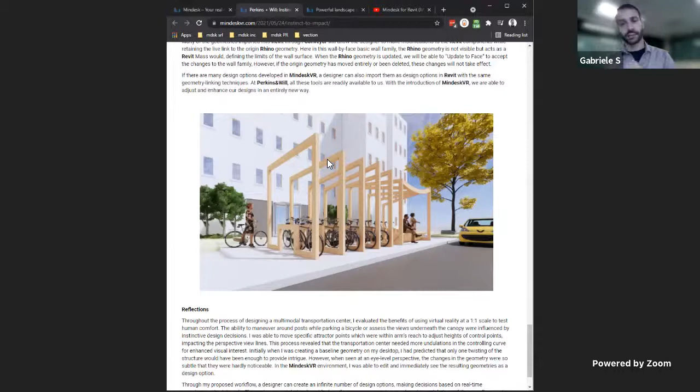But again, the data is flexible, so this geometry data can be pushed into Unreal, for example, to have a rendered view. So you can then do things like solar studies, shadows, glare, and much more, or just create a video presentation for your client that is beautiful and stunning.

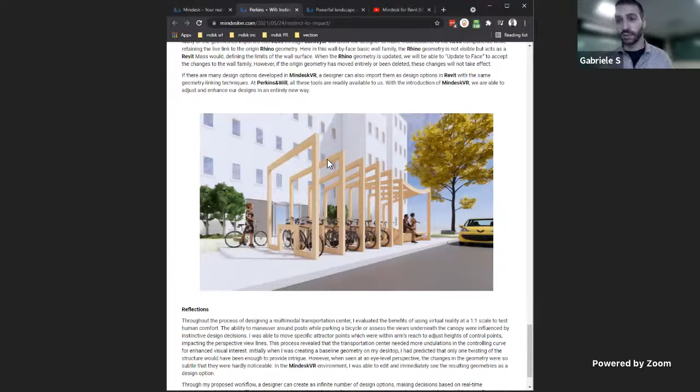All right. So I want to show you now how the software works operationally. I just need a moment to load my VR headset. Can you still hear me? I can hear you.

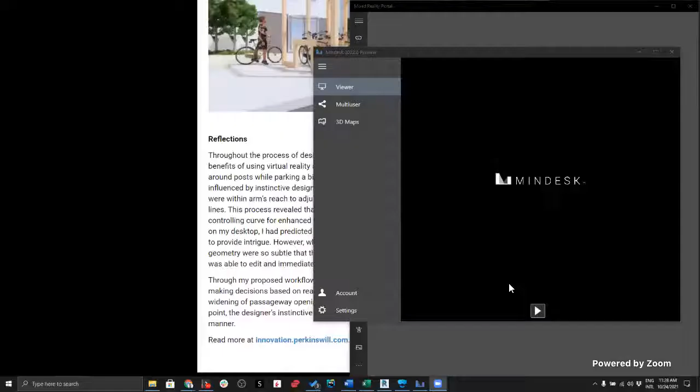We're actually sending a letter to both Zoom and Microsoft, so this can be implemented and handled better in future Windows applications. But yeah, it's normal business. Okay, so now we can move forward. I can share my monitor and show you how the process works. I have prepared a very simple project. We can now see side by side the Revit model and the Mindesk interface.

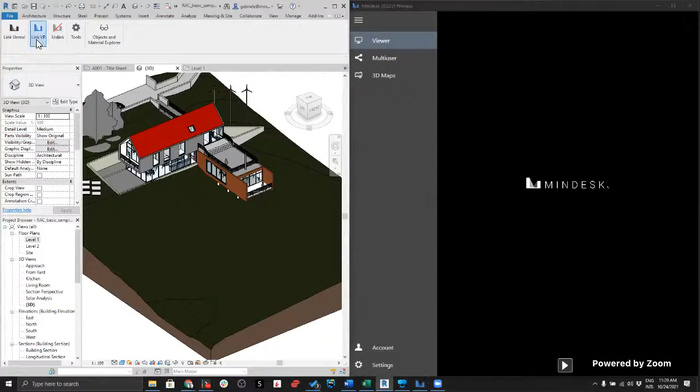So when you install Mindesk on your PC, it installs the core application, which is the Mindesk Studio that you see here on the right, and a plugin for the specific source software, in this case Revit, and that generates some new commands like Link VR. And that's all you need. You can then click this button. The system will do a really quick check, and it will ask you which view you would like to share.

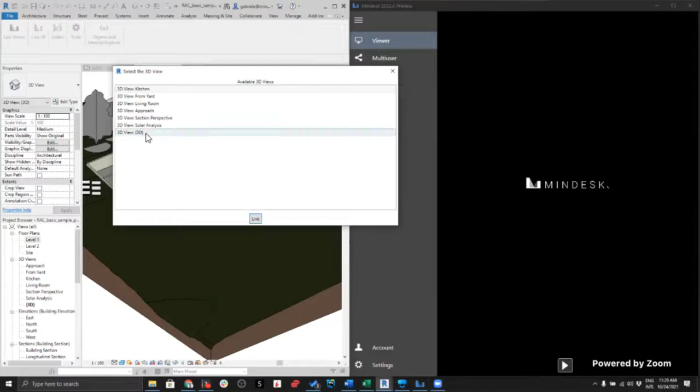This is important because sometimes designers like to have different views which are associated with different filters. So sometimes you have a view of phase one of your project, or phase two, or completion. So that gives you the opportunity to filter and focus exactly on what is important. So now you see the project is immediately appearing in the Mindesk Studio. And from now on, I can put the headset on and be immersed, so we can explore this project together.

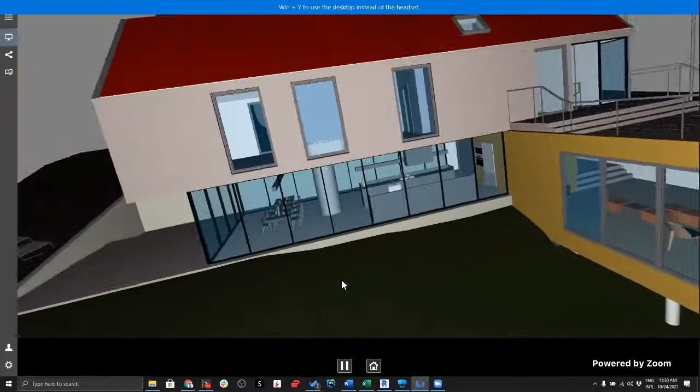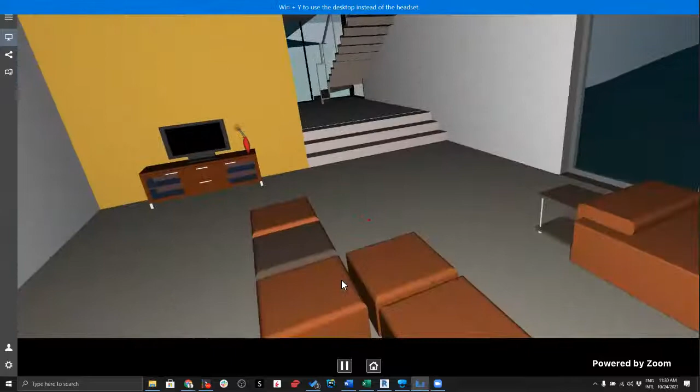Hopefully the frame rate through Zoom is good enough, but I can guarantee it's super fluid from inside here. So let's explore this project. The first thing I notice is that we can manipulate the project and move it around, like if it was a physical project. We could get inside it and explore in one-to-one scale. We could shoot rays just to move inside the project. Now we're exploring the kitchen.

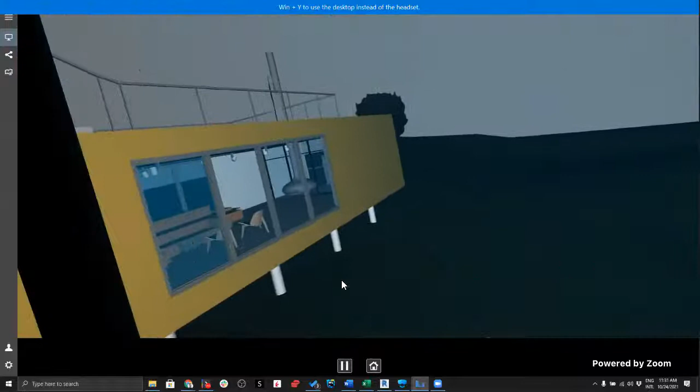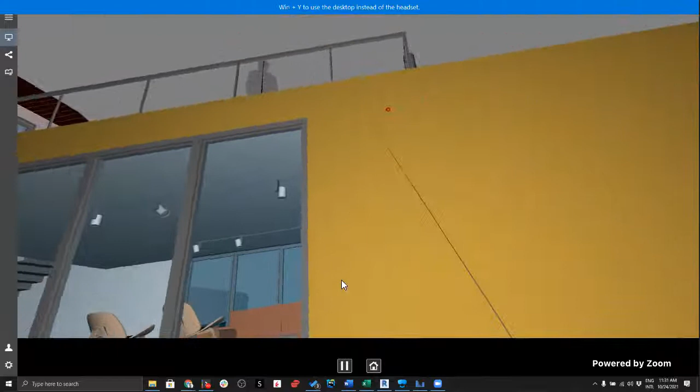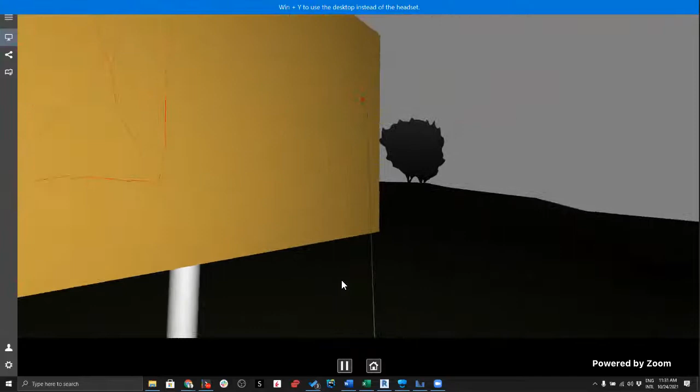So let's say I'm the future owner of this house, and I want to customize this house in a way that from this point, I want to see the chimney. So I could ask the designer to move this window. There's a very simple tool for this. We can activate the pen and say, hey, move this on the right and align to this. So now I created a very simple sketch on this wall. And the sketch data is saved into the BIM model. So if I hit save on Revit, someone else opening this project can further edit that and see that.

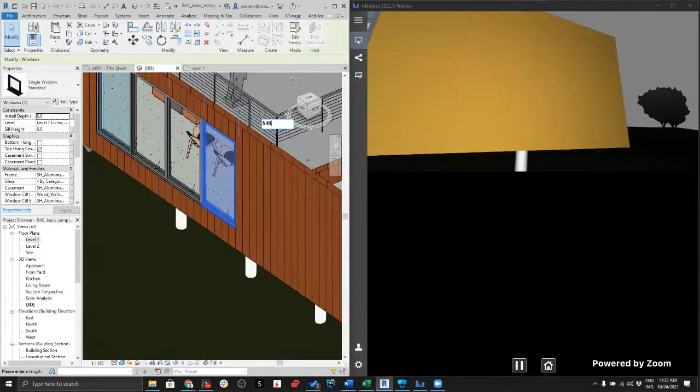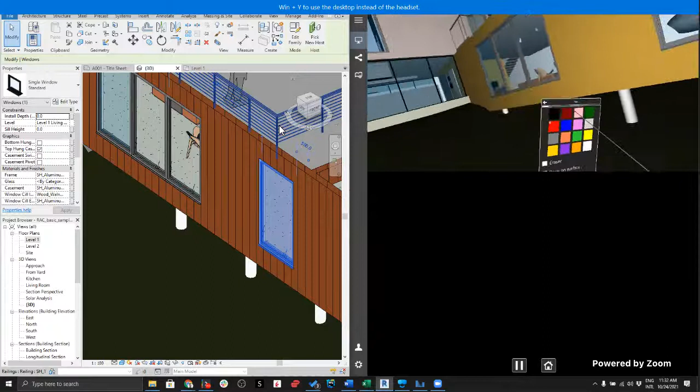So let me show you one thing. We still have Revit here, and we still have this window. So the designer, who can be joining the session remotely, can change the code, and this is immediately reflected inside the virtual reality. So you can see how this tool can open up unprecedented collaborative opportunities. And this is in terms of interaction, but it's also a good way to explore the properties of the product.

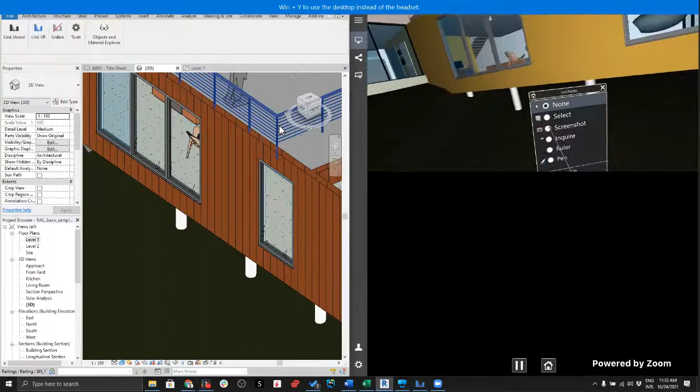Like, for example, we can inquire this wall and read all the metadata associated with it, which is extremely important in the BIM world. And once this is done, you can just aim and click to create a screenshot, and then share this screenshot with colleagues and other stakeholders. So the process is extremely fluid and also extremely powerful.

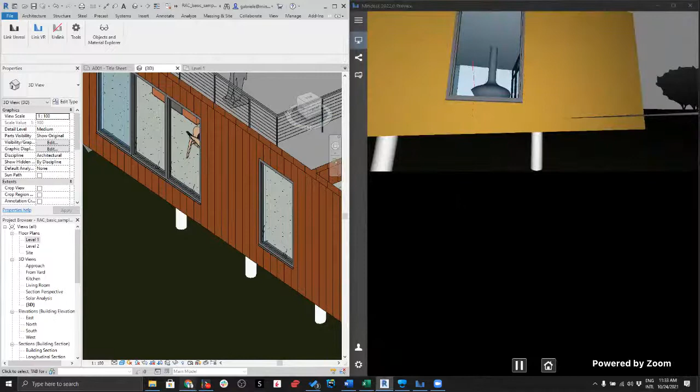There is one more thing I would like to show you, which is the multi-user aspect of it. So let me just, here we go. Oh, nope. This one.

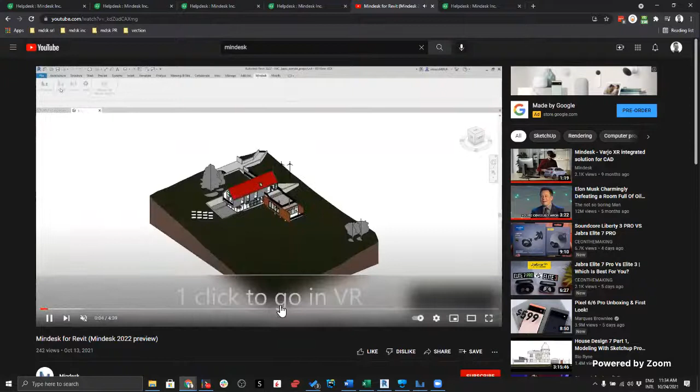The first video you'll find is this one, which clearly shows basically what I just showed to you.

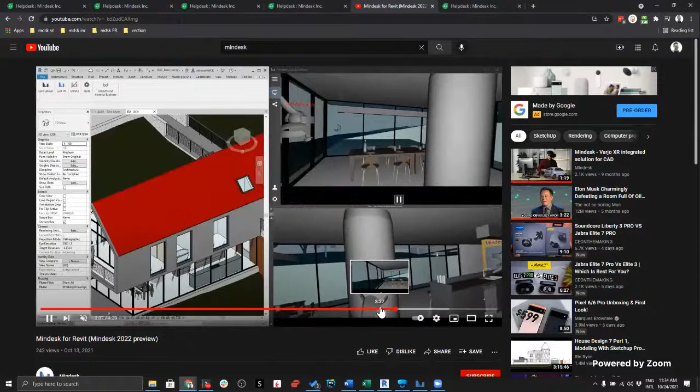But if we move forward, this is what a multi-user session looks like. So you can see other people in form of avatar. You can recognize them easily because there's the tag name, and basically share the same virtual room and iterate on this project. Now, when something has changed in Revit, this immediately propagates to everyone joining the room. So this is where you can add the contribution of everyone.

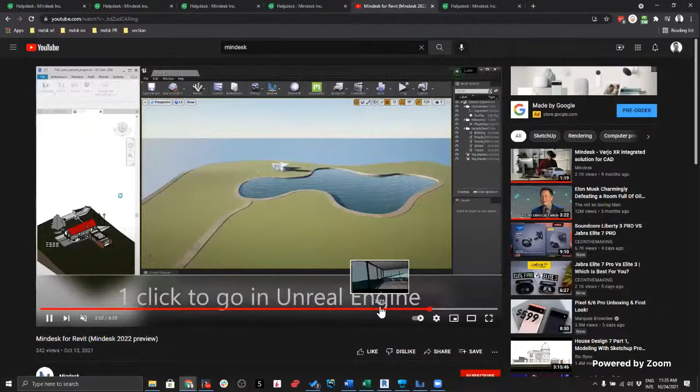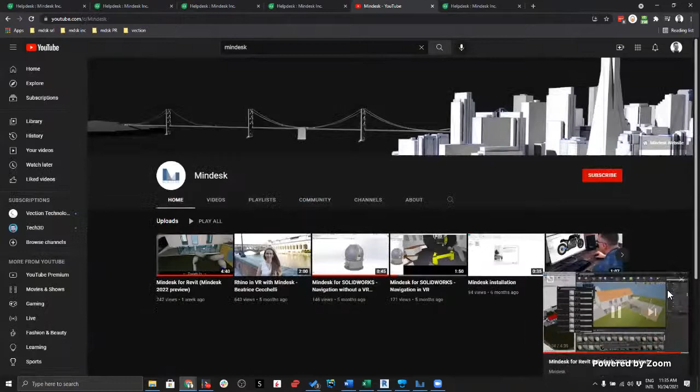In this other case, we use Mindesk to connect the BIM model into Unreal Engine. By doing so, we could easily play with light, shadows and materials and apply them to the project for a super quick visualization. I want to show you this again. Oh, here we go. There is a detail I want to show you. So even in Unreal, the geometry is manipulated from Revit. So when this window is moved, it also moves in Unreal.

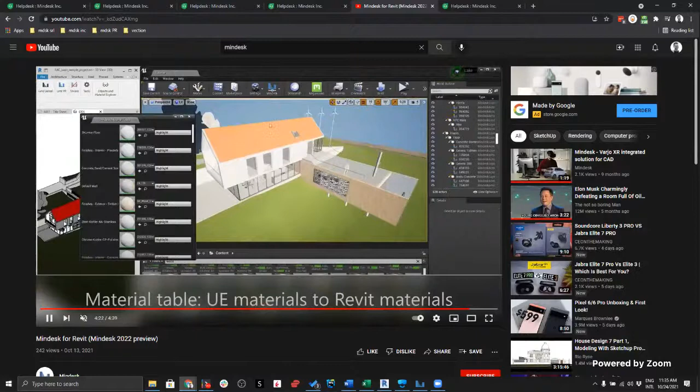So the takeaway of all this is that back in the day, all this software part of a single workflow was siloed. And Mindesk is bringing them together with direct data piping among them, which is real time, which is amazing because it's gonna save hours and hours of hard work. I think that summarizes the goal that we're reaching with this technology and how we intend to foster the development of design projects. I think that's a great product demo, and those features were amazing.

I'm curious to know, let's say if you define or add more materials in Unreal, and if that material is not defined in Revit, are there compatibility challenges? That's a great question. So Revit always assigns a default material, and you can either choose to stay with the default material or customize your material. But at the end of the day, every Revit model has a bill of materials, the list of all the materials that have been used in that specific project. What Mindesk does is translate this list into an Unreal list of materials. So you can say material blue and translate it into glass. So every object that has material blue in Revit becomes glass in Mindesk.